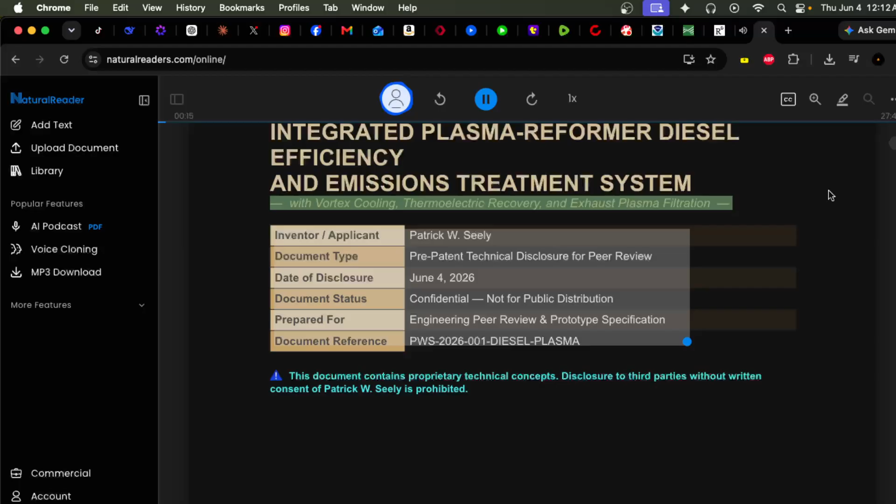Confidential Pre-Patent Technical Disclosure: Integrated Plasma Reformer Diesel Efficiency and Emissions Treatment System, with vortex cooling, thermoelectric recovery, and exhaust plasma filtration. This document contains proprietary technical concepts. Disclosure to third parties without written consent of Patrick W. Seely is prohibited.

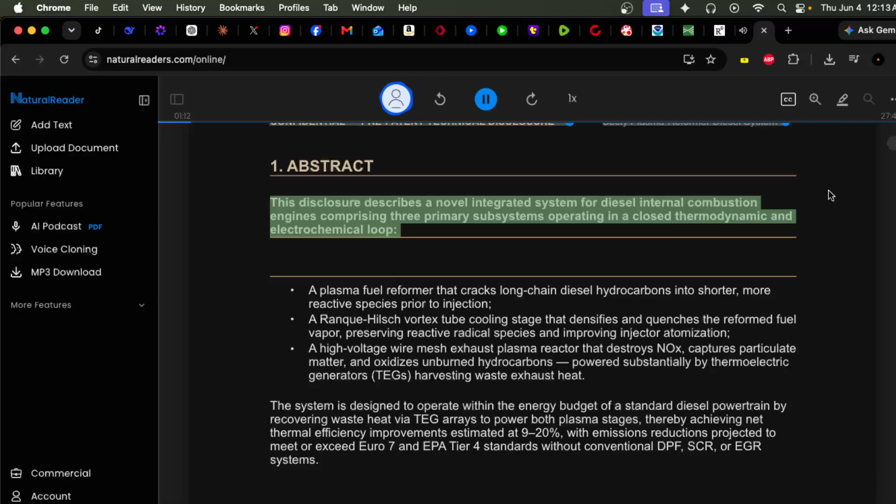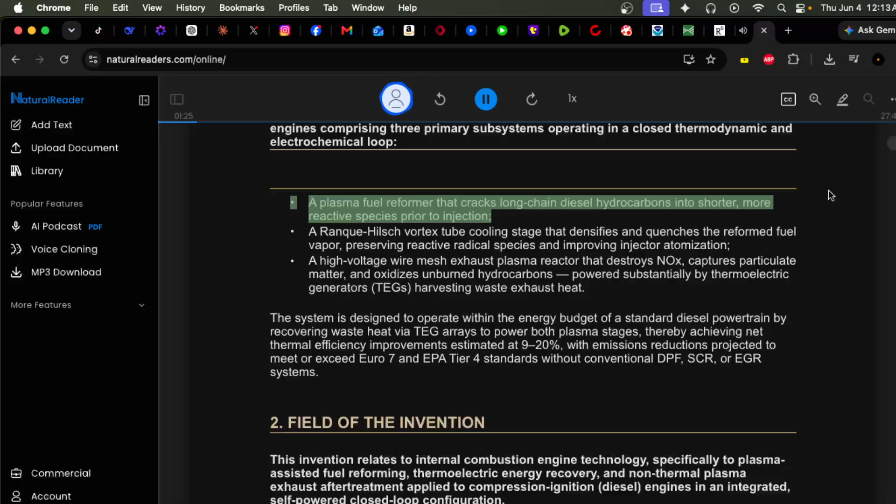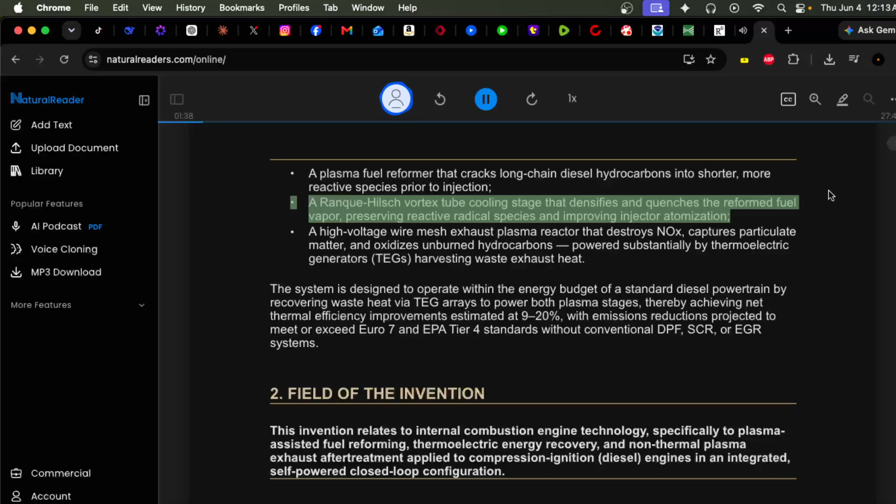1. Abstract. This disclosure describes a novel integrated system for diesel internal combustion engines comprising three primary subsystems operating in a closed thermodynamic and electrochemical loop: a plasma fuel reformer that cracks long-chain diesel hydrocarbons into shorter, more reactive species prior to injection; a Ranque-Hilsch vortex tube cooling stage that densifies and quenches the reformed fuel vapor, preserving reactive radical species and improving injector atomization; and a high-voltage wire mesh exhaust plasma reactor that destroys NOx, captures particulate matter, and oxidizes unburned hydrocarbons, powered substantially by thermoelectric generators harvesting waste exhaust heat.

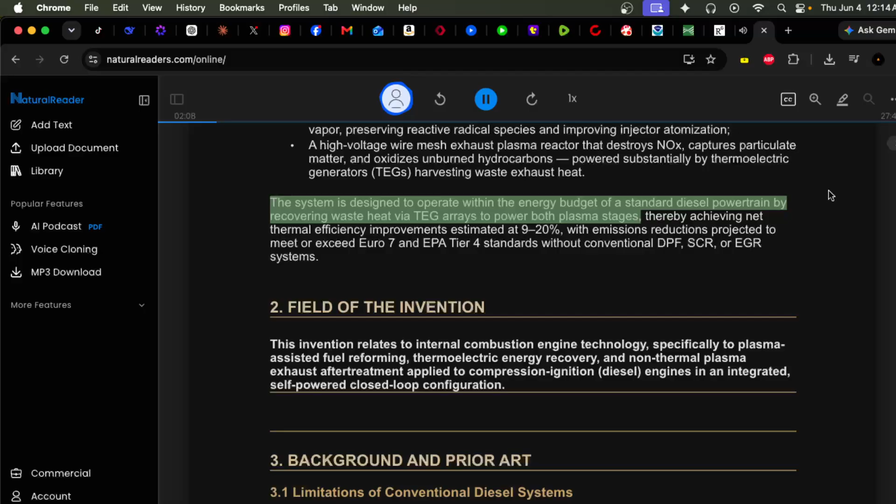The system is designed to operate within the energy budget of a standard diesel powertrain by recovering waste heat via TEG arrays to power both plasma stages, thereby achieving net thermal efficiency improvements estimated at 9 to 20%, with emissions reductions projected to meet or exceed Euro 7 and EPA Tier 4 standards without conventional DPF, SCR, or EGR systems.

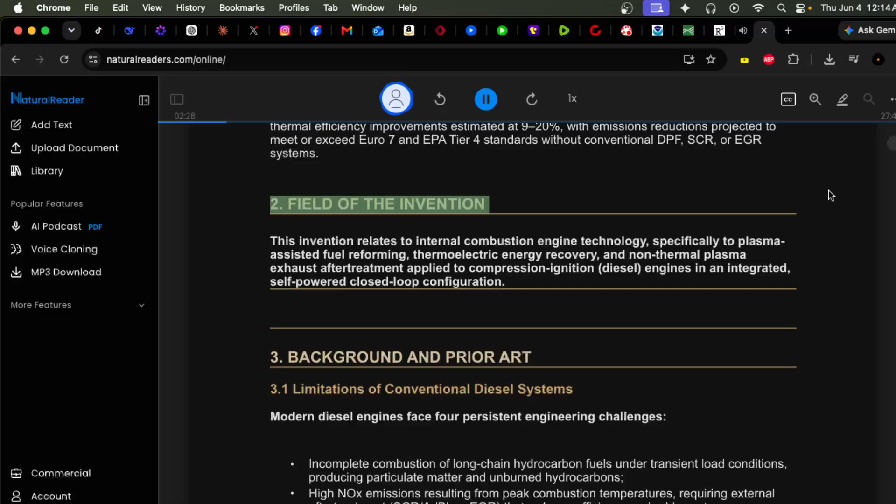2. Field of the invention. This invention relates to internal combustion engine technology, specifically to plasma-assisted fuel reforming, thermoelectric energy recovery, and non-thermal plasma exhaust after-treatment applied to compression ignition engines in an integrated, self-powered closed-loop configuration.

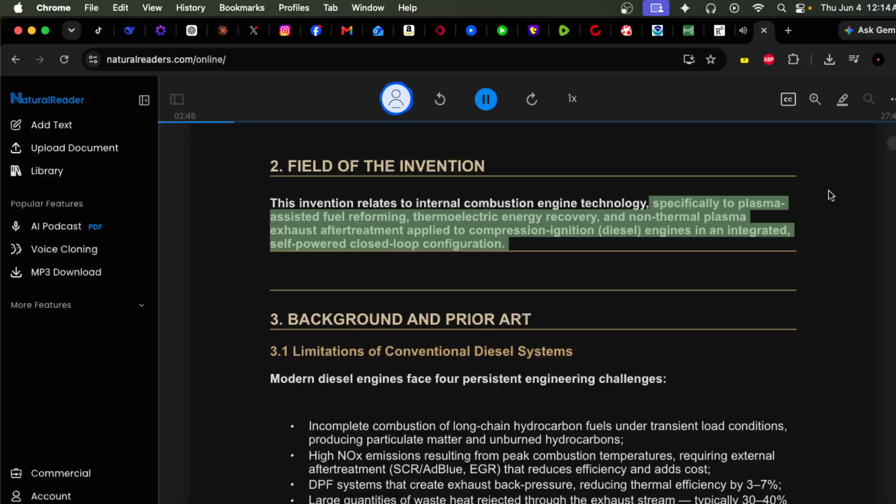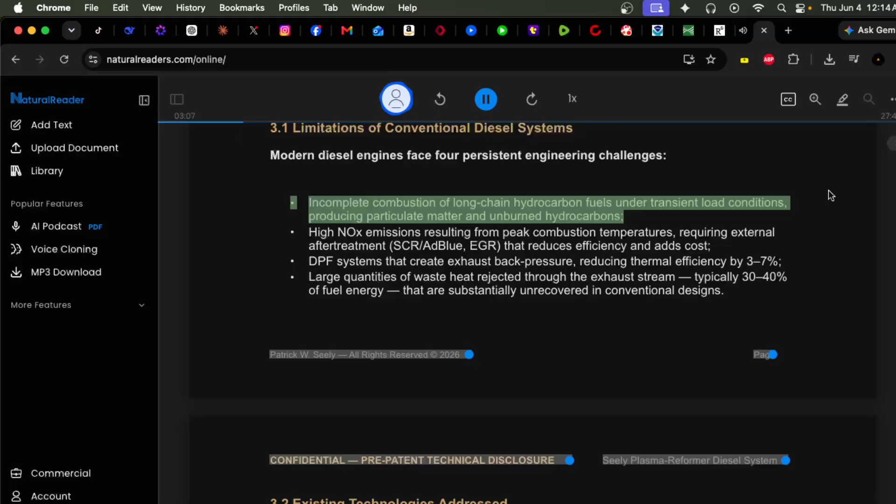3. Background and prior art. 3.1 Limitations of conventional diesel systems. Modern diesel engines face four persistent engineering challenges: incomplete combustion of long-chain hydrocarbon fuels under transient load conditions, producing particulate matter and unburned hydrocarbons; and high NOx emissions resulting from peak combustion temperatures, requiring external aftertreatment that reduces efficiency and adds cost.

DPF systems create exhaust back pressure, reducing thermal efficiency by 3 to 7%. Large quantities of waste heat are rejected through the exhaust stream, typically 30 to 40% of fuel energy, that are substantially unrecovered in conventional designs.

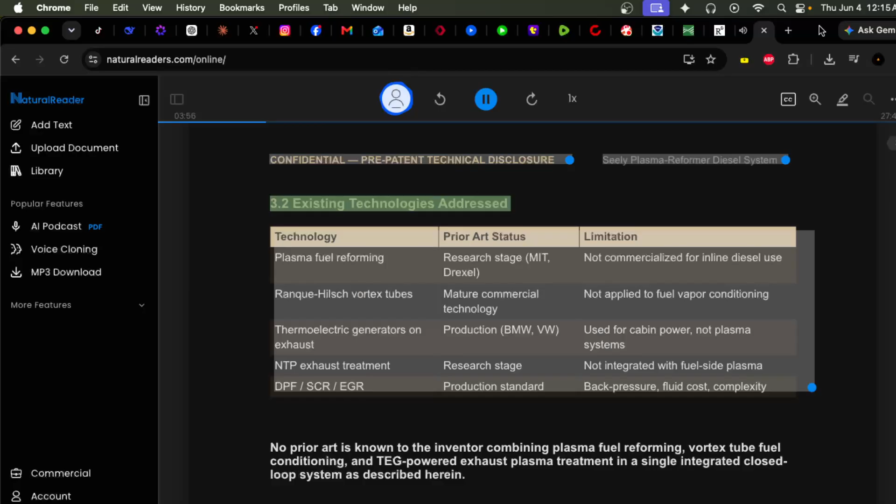3.2 Existing technologies addressed. No prior art is known to the inventor combining plasma fuel reforming, vortex tube fuel conditioning, and TEG-powered exhaust plasma treatment in a single integrated closed-loop system as described herein.

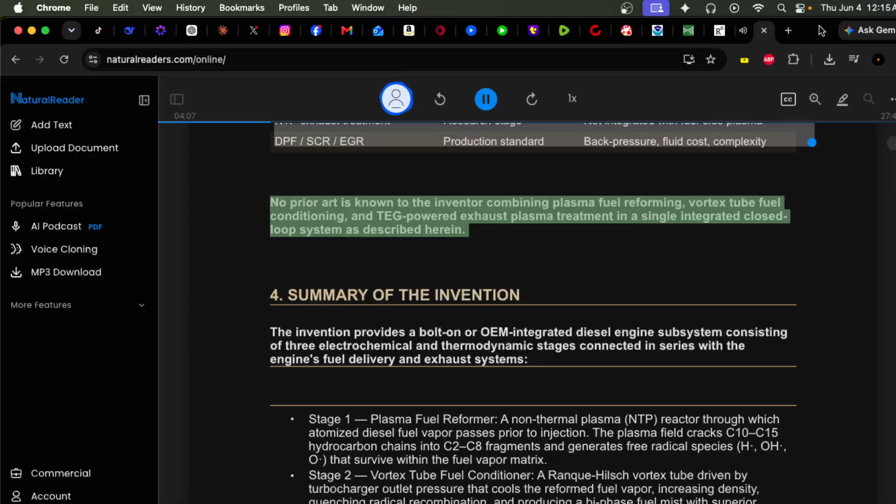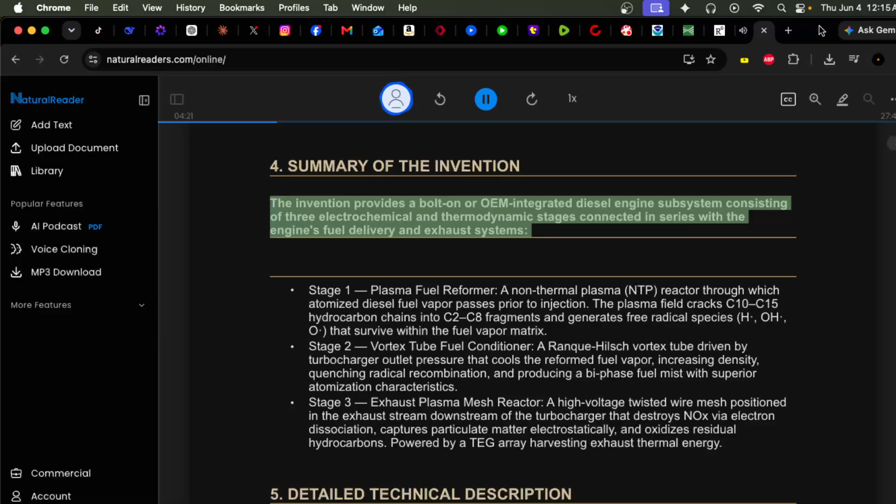4. Summary of the invention. The invention provides a bolt-on or OEM integrated diesel engine subsystem consisting of three electrochemical and thermodynamic stages connected in series with the engine's fuel delivery and exhaust systems.

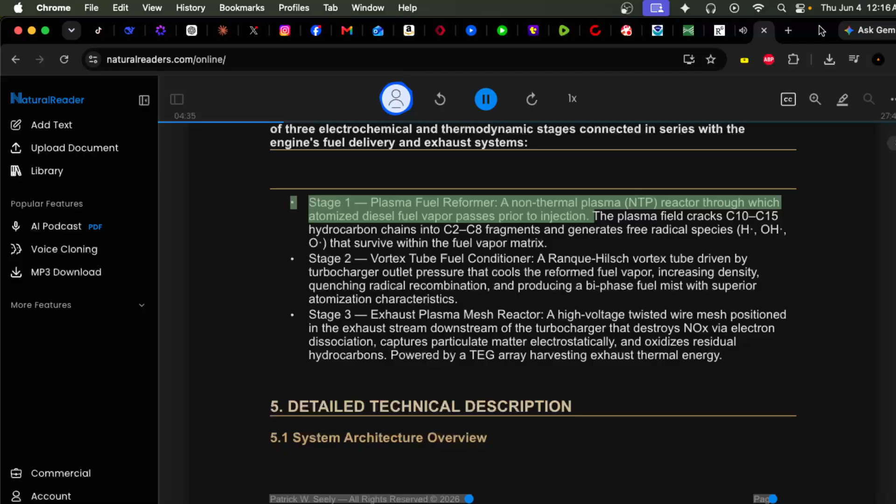Stage 1, Plasma Fuel Reformer: a non-thermal plasma reactor through which atomized diesel fuel vapor passes prior to injection. The plasma field cracks C10-C15 hydrocarbon chains into C2-C8 fragments and generates free radical species that survive within the fuel vapor matrix.

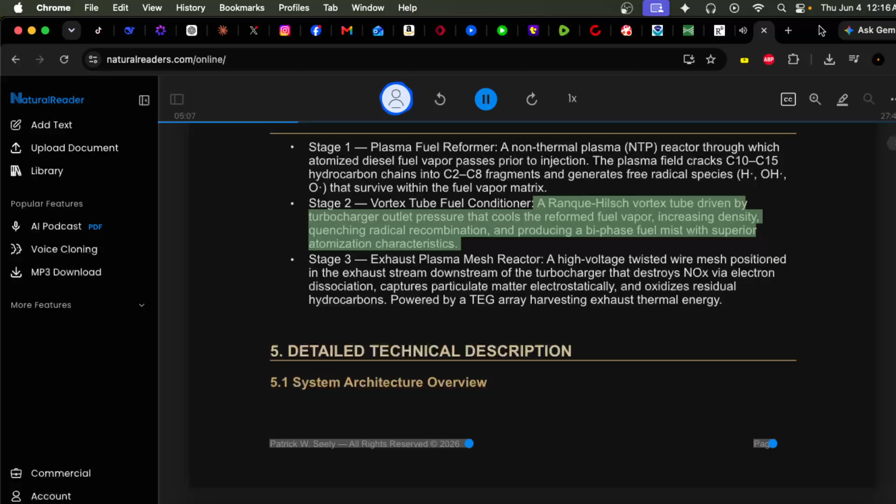Stage 2, Vortex Tube Fuel Conditioner: a Ranque-Hilsch vortex tube driven by turbocharger outlet pressure that cools the reformed fuel vapor, increasing density, quenching radical recombination, and producing a biphase fuel mist with superior atomization characteristics.

Stage 3, Exhaust Plasma Mesh Reactor: a high-voltage twisted wire mesh positioned in the exhaust stream downstream of the turbocharger that destroys NOx via electron dissociation, captures particulate matter electrostatically, and oxidizes residual hydrocarbons, powered by a TEG array harvesting exhaust thermal energy.

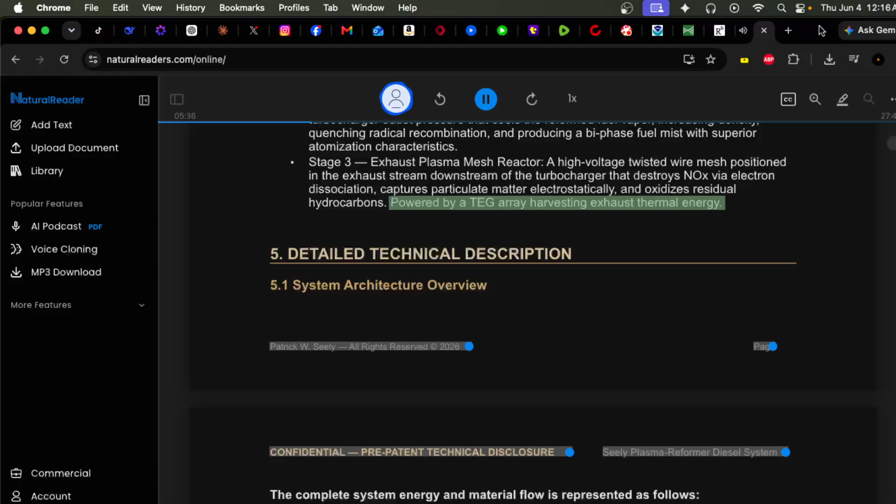5. Detailed Technical Description. 5.1 System Architecture Overview. The complete system energy and material flow is represented as follows. Confidential Pre-Patent Technical Disclosure: Seely Plasma Reformer Diesel System.

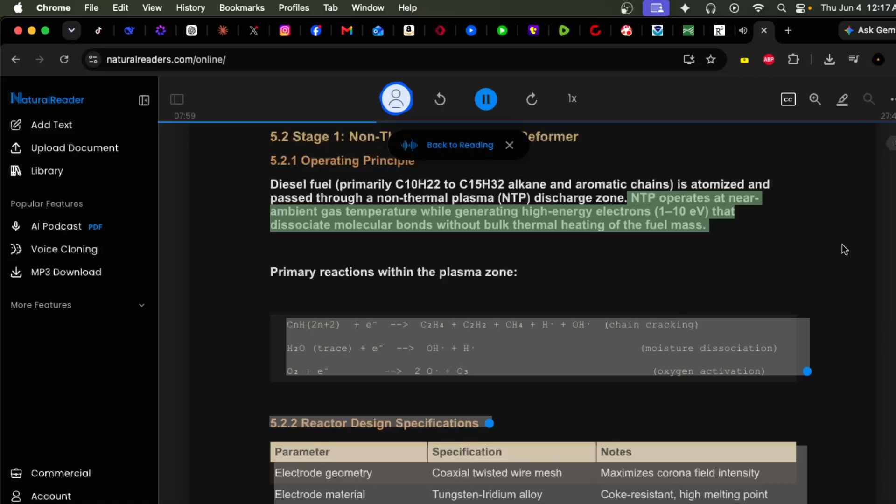5.2 Stage 1, Non-Thermal Plasma Fuel Reformer. 5.2.1 Operating Principle. Diesel fuel is atomized and passed through a non-thermal plasma discharge zone. NTP operates at near ambient gas temperature while generating high-energy electrons that dissociate molecular bonds without bulk thermal heating of the fuel mass. Primary reactions occur within the plasma zone.

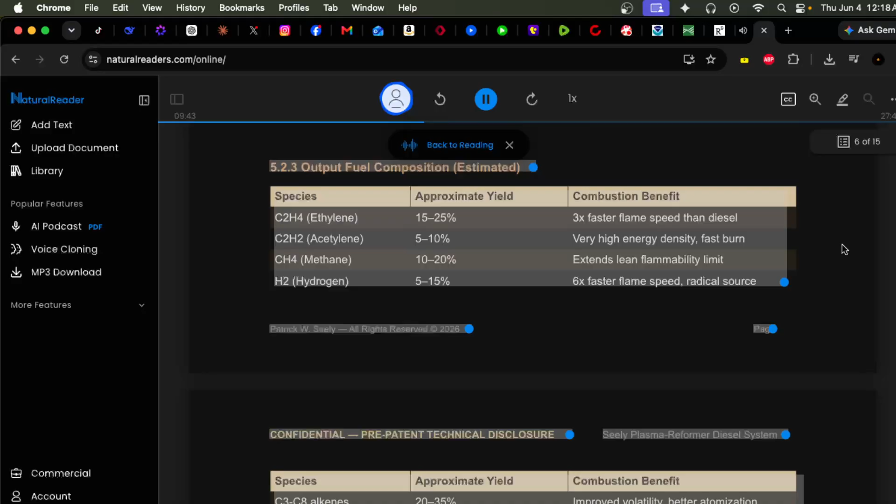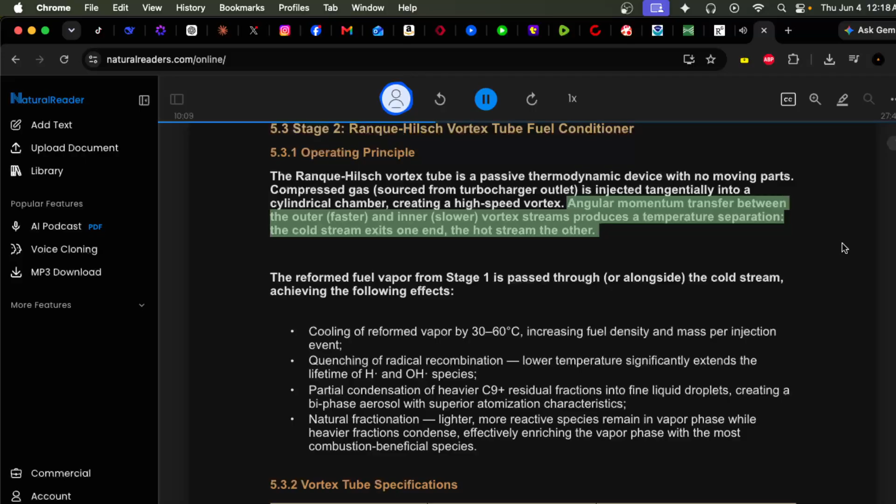5.3 Stage 2, Ranque-Hilsch Vortex Tube Fuel Conditioner. 5.3.1 Operating Principle. The Ranque-Hilsch Vortex Tube is a passive thermodynamic device with no moving parts. Compressed gas is injected tangentially into a cylindrical chamber, creating a high-speed vortex. Angular momentum transfer between the outer and inner vortex streams produces a temperature separation; the cold stream exits one end, the hot stream the other.

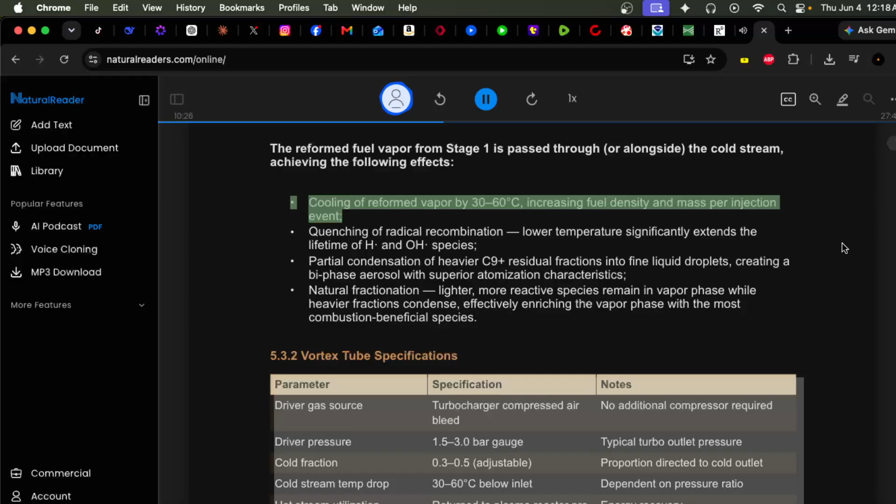The reformed fuel vapor from stage 1 is passed through the cold stream, achieving cooling of the reformed vapor by 30 to 60 degrees Celsius, increasing fuel density and mass per injection event, and quenching radical recombination—lower temperature significantly extends the lifetime of H and OH species.

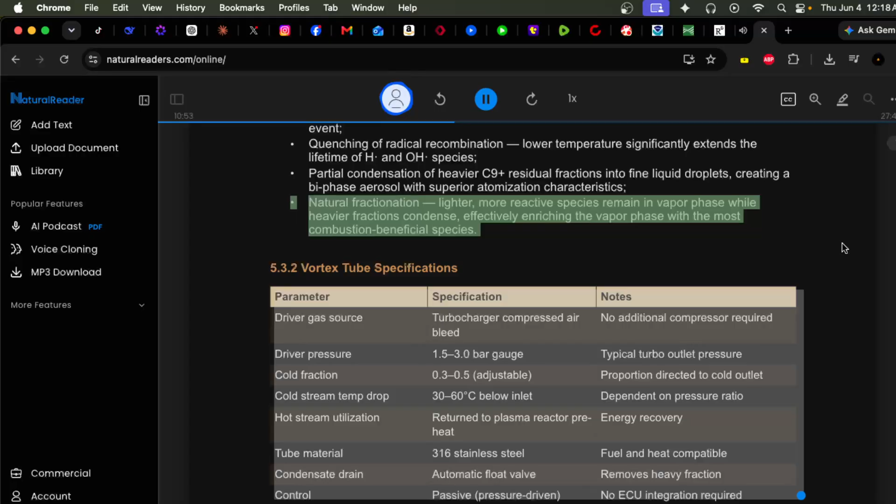This produces partial condensation of heavier C9-plus residual fractions into fine liquid droplets, creating a biphase aerosol with superior atomization characteristics. Natural fractionation occurs: lighter, more reactive species remain in vapor phase while heavier fractions condense, effectively enriching the vapor phase with the most combustion-beneficial species.

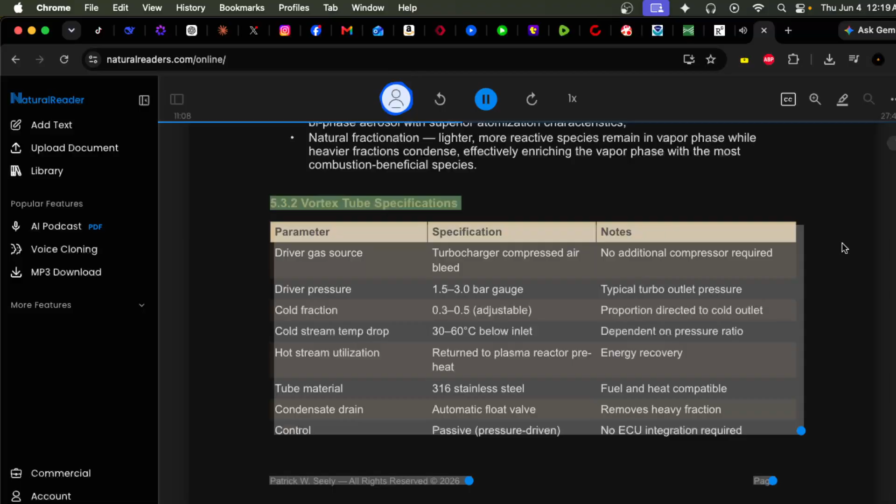5.3.2 Vortex Tube Specifications. 5.4 Stage 3, Exhaust Plasma Mesh Reactor.

Stage 3, Exhaust Plasma Mesh Reactor.

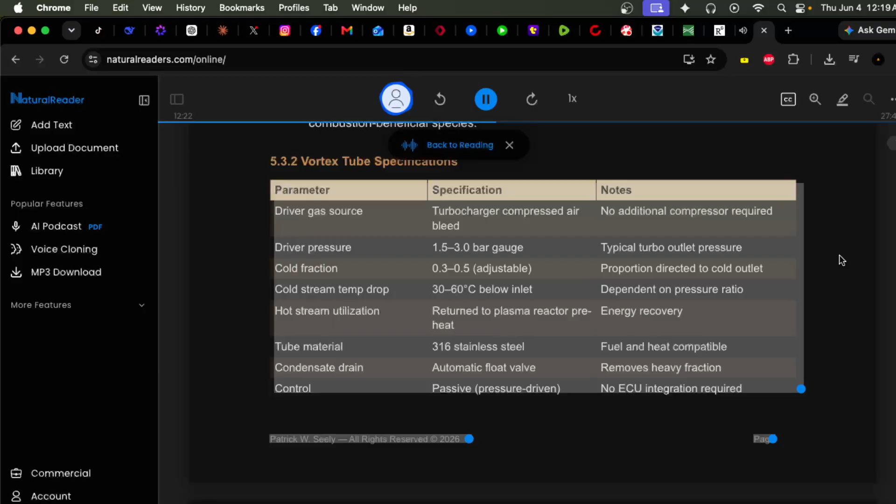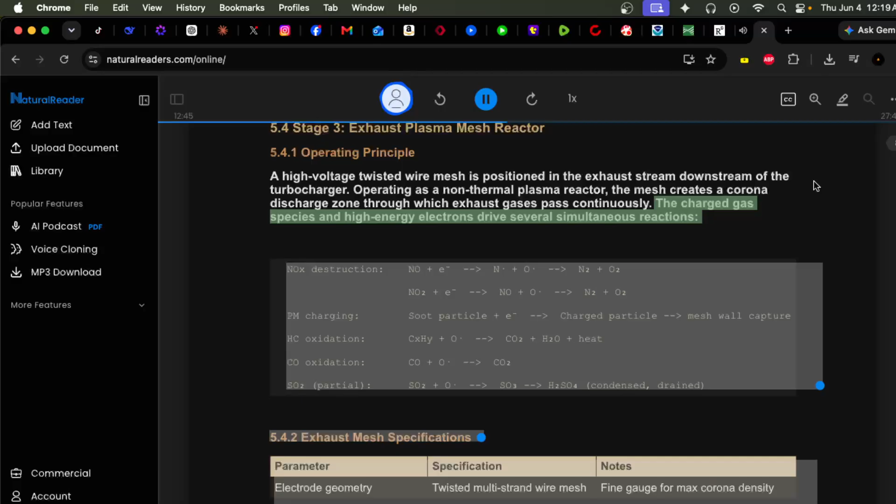5.4.1 Operating Principle. A high-voltage twisted wire mesh is positioned in the exhaust stream downstream of the turbocharger. Operating as a non-thermal plasma reactor, the mesh creates a corona discharge zone through which exhaust gases pass continuously. The charged gas species and high-energy electrons drive several simultaneous reactions.

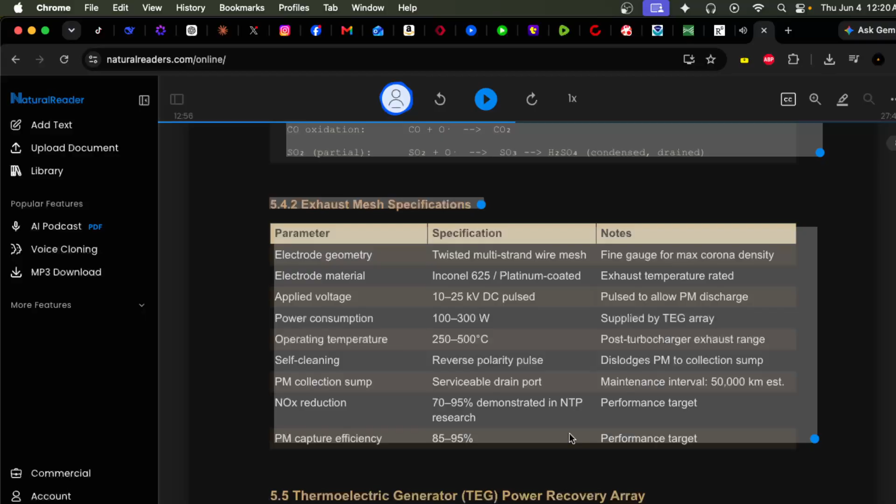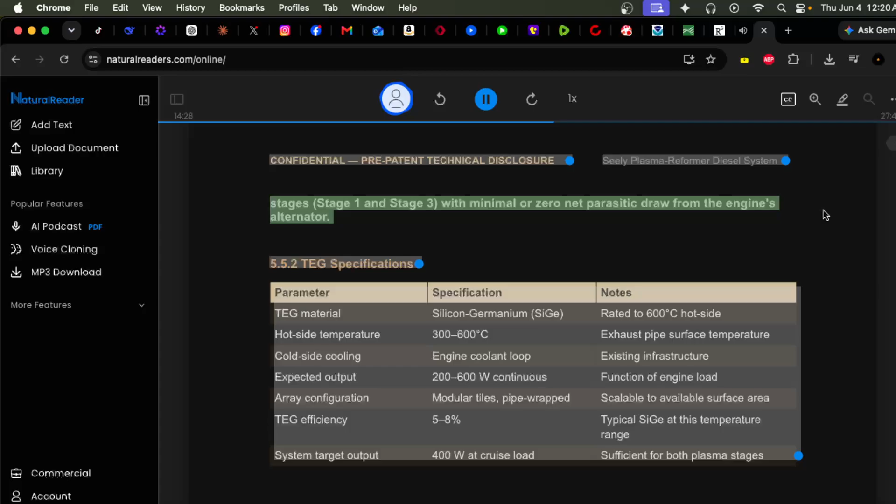5.5 Thermoelectric Generator Power Recovery Array. 5.5.1 Purpose. The TEG array is the key enabler of system energy closure. By harvesting waste heat from the exhaust stream, it generates sufficient electrical power to operate both plasma stages with minimal or zero net parasitic draw from the engine's alternator.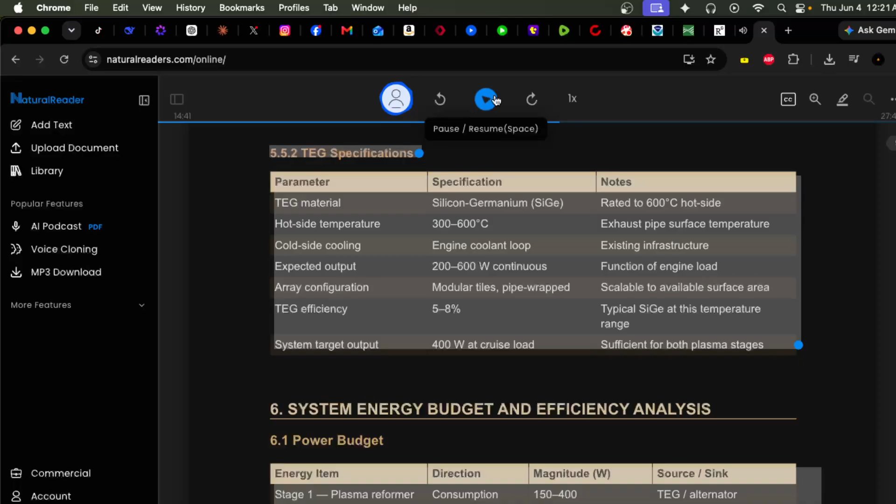6. System energy budget and efficiency analysis. 6.1 Power budget. 6.2 Thermal efficiency gains.

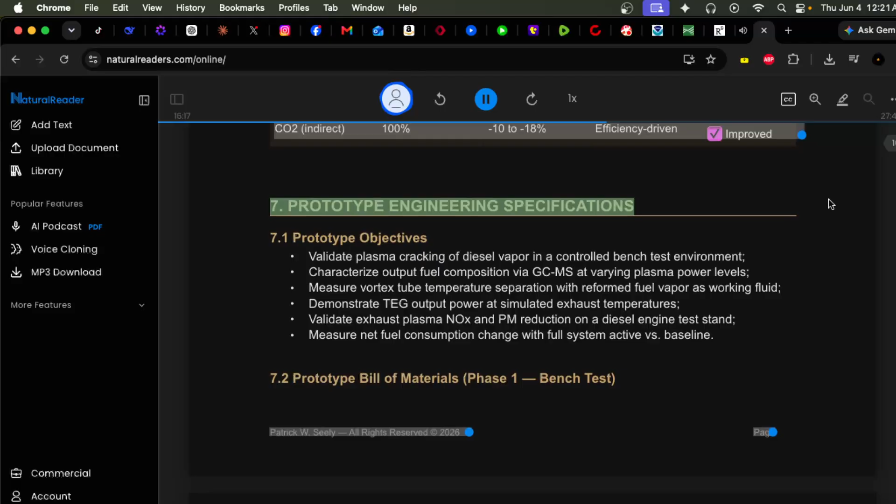7. Prototype engineering specifications. 7.1 Prototype objectives. Validate. 7.3 Prototype build phases.

8. Proposed patent claims. The following represent preliminary claim concepts for formal patent drafting by a registered patent attorney. 8.1 Independent claims. Claim 1, System claim.

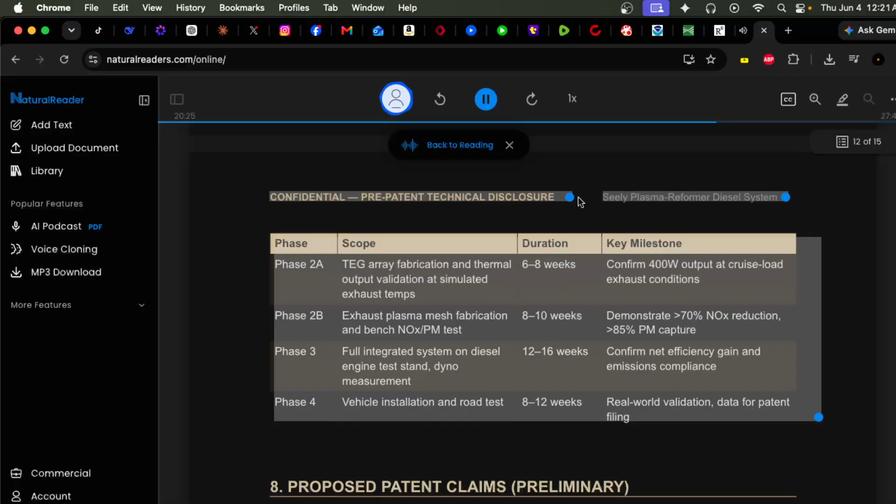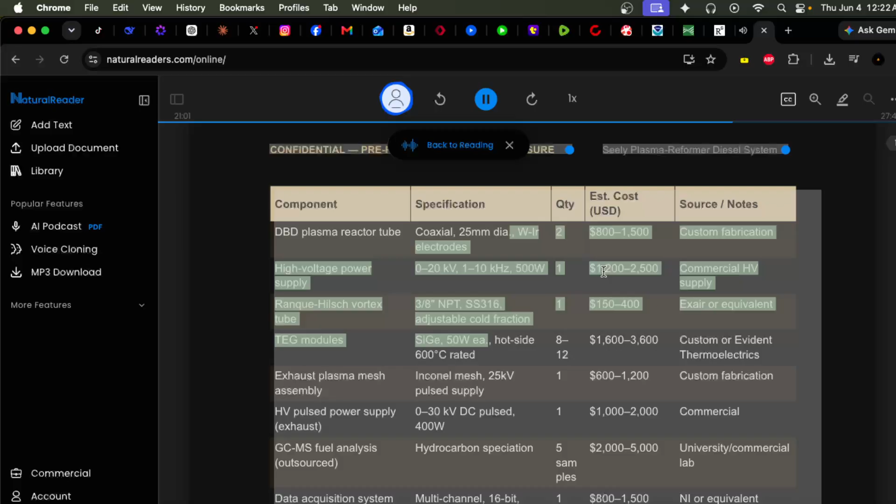A diesel engine fuel treatment and exhaust after-treatment system comprising a non-thermal plasma fuel reforming reactor positioned in line between the fuel supply and fuel injectors; a Ranque-Hilsch vortex tube positioned to receive reformed fuel vapor, and cooling said vapor using turbocharger-sourced compressed gas; and a high-voltage wire mesh plasma reactor positioned in the exhaust stream downstream of the turbocharger, wherein electrical power for said reactors is supplied substantially by thermoelectric generators harvesting thermal energy from the exhaust stream.

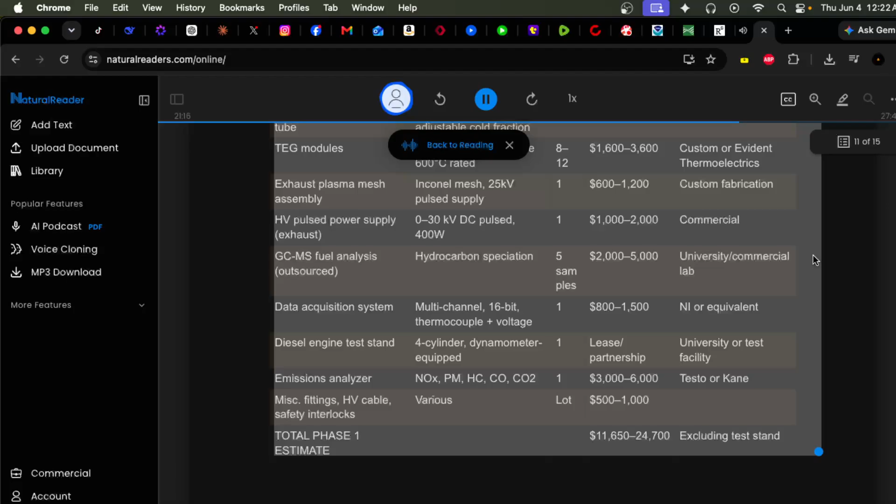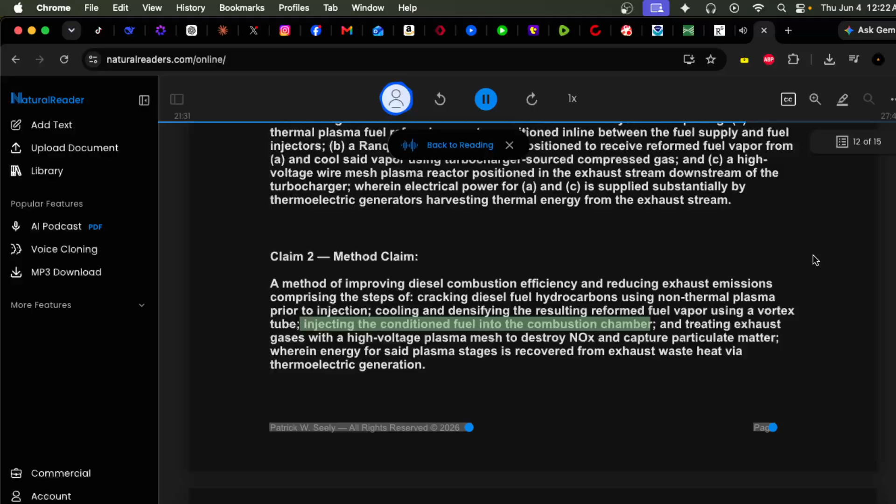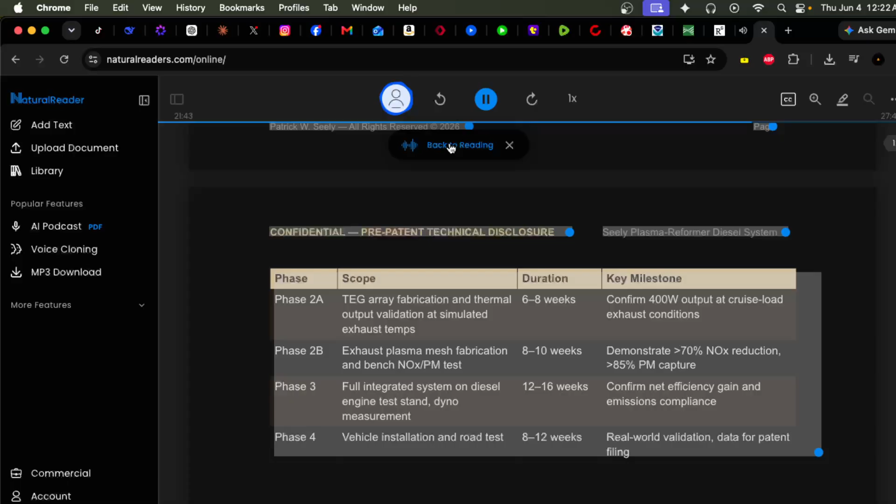Claim 2, Method claim. A method of improving diesel combustion efficiency and reducing exhaust emissions comprising the steps of cracking diesel fuel hydrocarbons using non-thermal plasma prior to injection, cooling and densifying the resulting reformed fuel vapor using a vortex tube, injecting the conditioned fuel into the combustion chamber, and treating exhaust gases with a high-voltage plasma mesh to destroy NOx and capture particulate matter, wherein energy for said plasma stages is recovered from exhaust waste heat via thermoelectric generation.

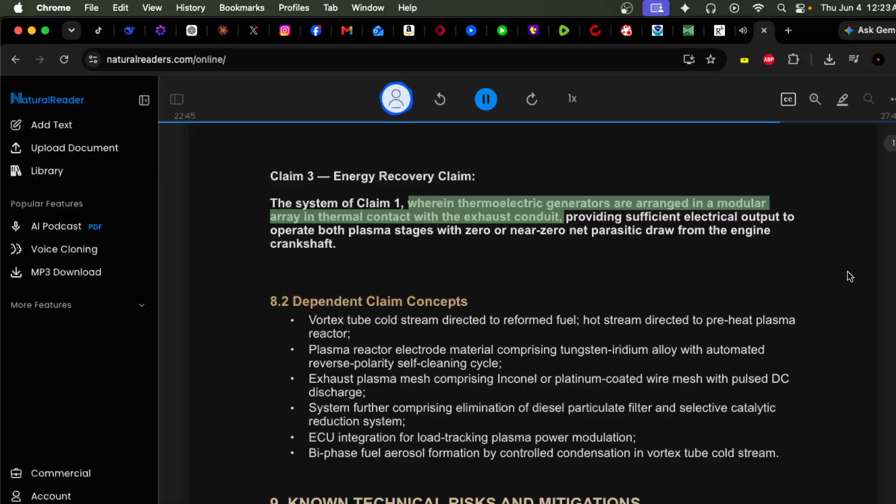Claim 3, Energy Recovery Claim. The system of Claim 1, wherein thermoelectric generators are arranged in a modular array in thermal contact with the exhaust conduit, providing sufficient electrical output to operate both plasma stages with zero or near zero net parasitic draw from the engine crankshaft.

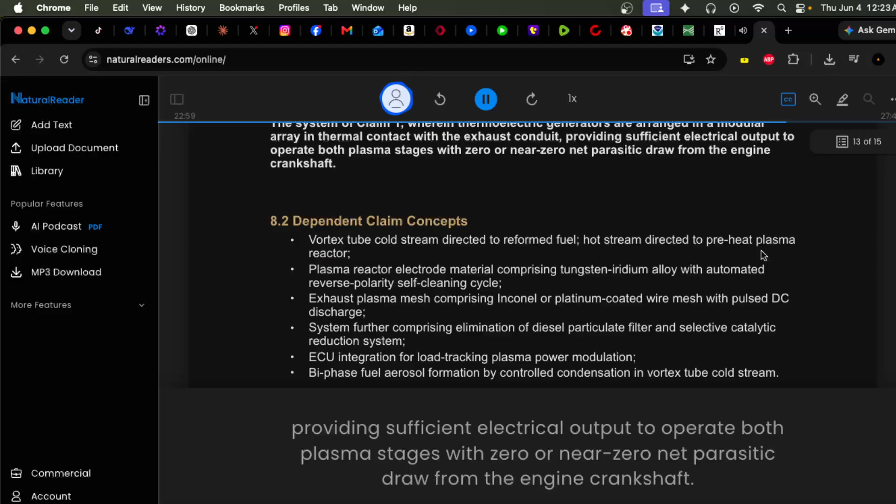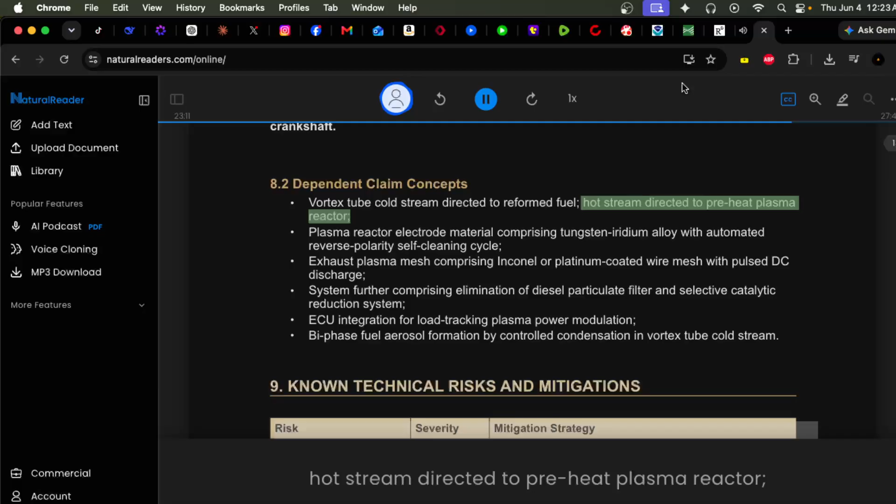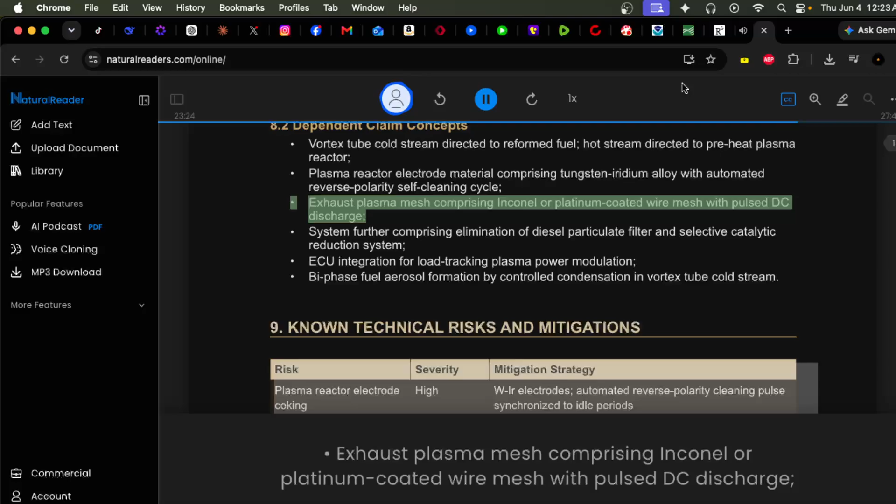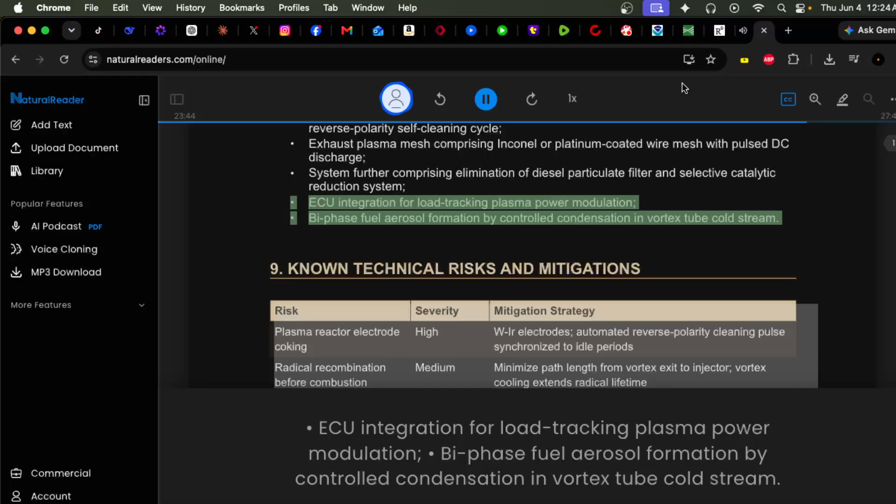8.2 Dependent Claim Concepts. Vortex tube cold stream directed to reformed fuel; hot stream directed to preheat plasma reactor. Plasma reactor electrode material comprising tungsten-iridium alloy with automated reverse polarity self-cleaning cycle. Exhaust plasma mesh comprising Inconel or platinum-coated wire mesh with pulsed DC discharge. System further comprising elimination of diesel particulate filter and selective catalytic reduction system. ECU integration for load tracking plasma power modulation, and biphase fuel aerosol formation by controlled condensation in vortex tube cold stream.

9. Known technical risks and mitigations. 10. Statement of novelty. To the best of the inventor's knowledge, the specific combination of non-thermal plasma diesel fuel reforming,

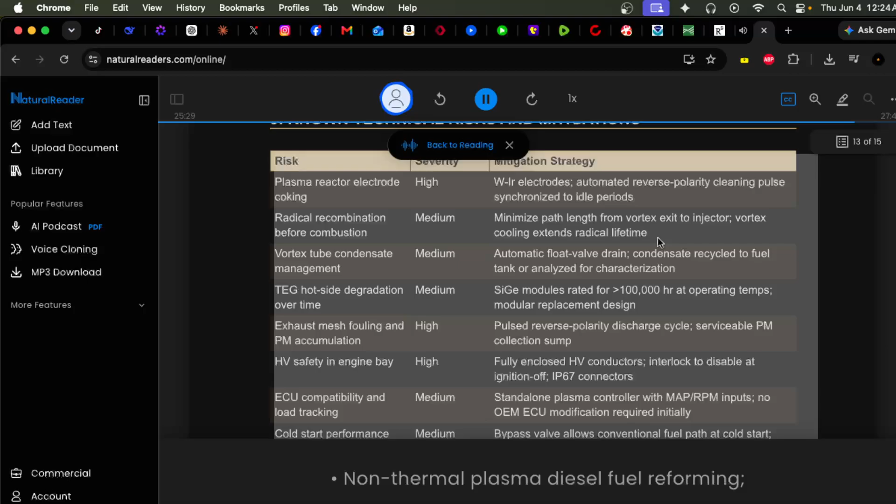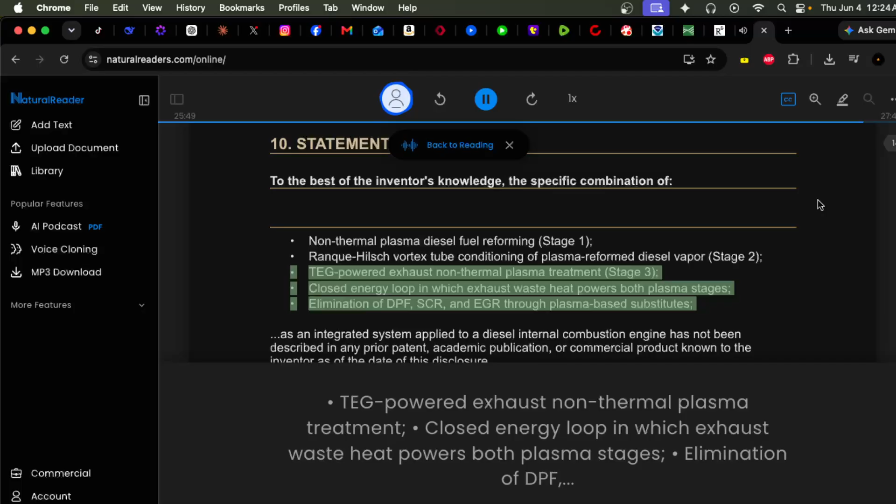Ranque-Hilsch vortex tube conditioning of plasma reformed diesel vapor, TEG-powered exhaust non-thermal plasma treatment, closed energy loop in which exhaust waste heat powers both plasma stages, elimination of DPF, SCR, and EGR through plasma-based substitutes, as an integrated system applied to a diesel internal combustion engine has not been described in any prior patent, academic publication, or commercial product known to the inventor as of the date of this disclosure.

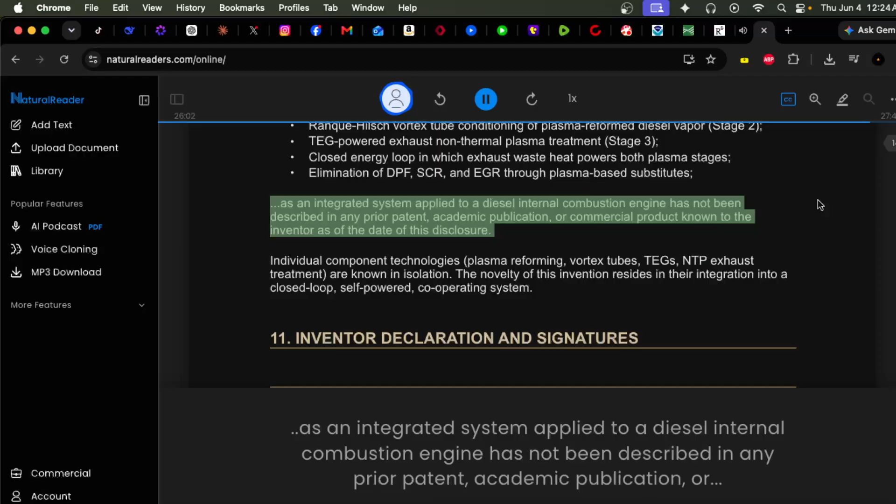Individual component technologies are known in isolation. The novelty of this invention resides in their integration into a closed-loop, self-powered, cooperating system.

11. Inventor Declaration and Signatures. I, Patrick W. Seely, hereby declare that I am the sole inventor of the subject matter described in this technical disclosure, that this document accurately represents the invention as conceived, and that I am prepared to assign rights and cooperate fully with patent counsel in the preparation and prosecution of patent applications based upon this disclosure.

Document reference: PWS 2026001 Diesel Plasma. This document was prepared for peer review purposes. It does not constitute a filed patent application. Formal patent filing should be conducted by a registered patent attorney or agent.